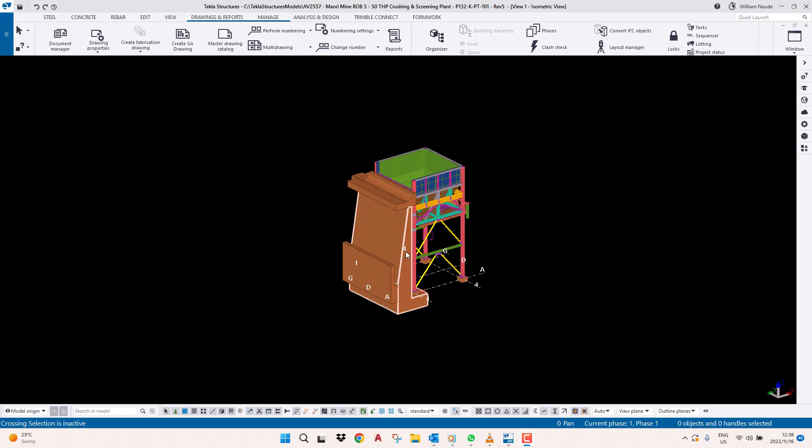In this video, we're going to cover how to export drawings from your normal PDF concept of printing to a DWG or DXF format. First, we're going to open up the Document manager on Tekla Structures 2022, and choose our drawing. Let's choose the isometric drawing. Open it up and wait for it to completely load.

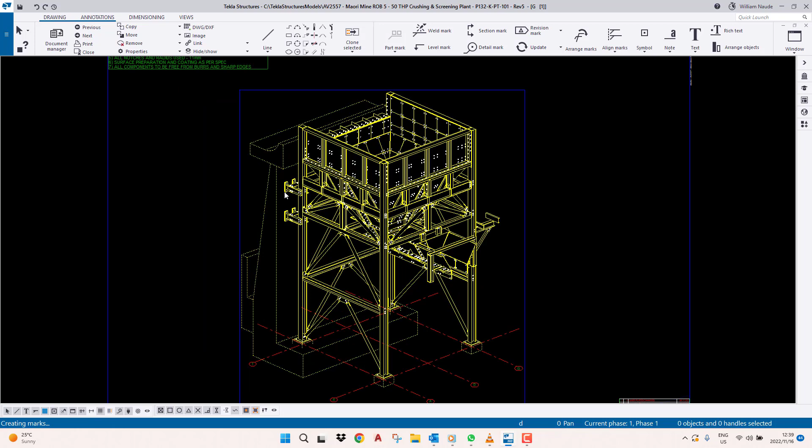As soon as you open up the drawing, I'm going to show you how this drawing works. What's important is that exactly what you see is what's going to be exported. I'm going to show you what you should try to avoid, especially on a view that has information on it. This is the isometric view.

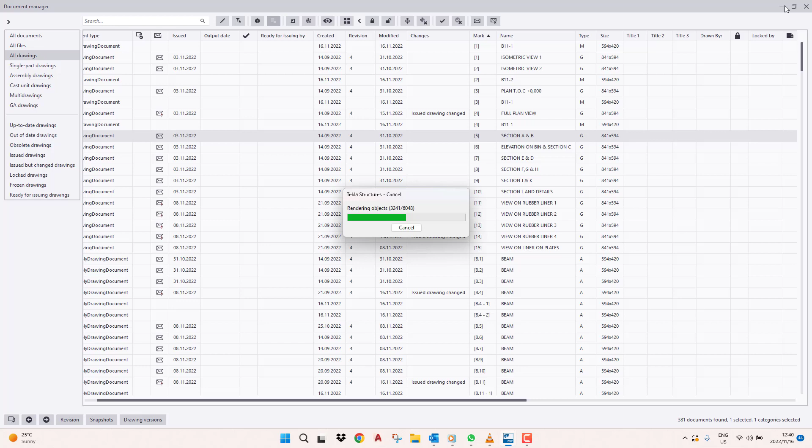So we're going to export two views: section A and B, and isometric view 1, which is the item I'm going to export to DWG format. As you can see, this part has quite a bit of information - some dimensions, etc. Now I'm going to show you what's going to happen.

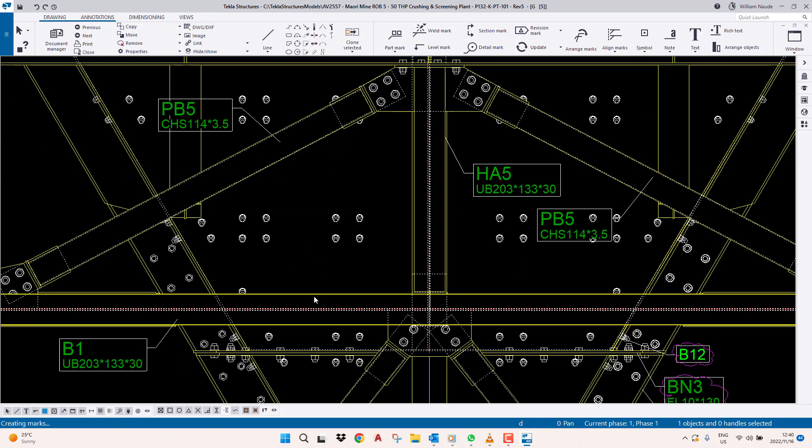Let's look at this item right here. I'm going to double click on this item along with a few other items - let's choose the pipe, those two pipes. What you need to avoid when exporting is putting it on a hatch solid, any color.

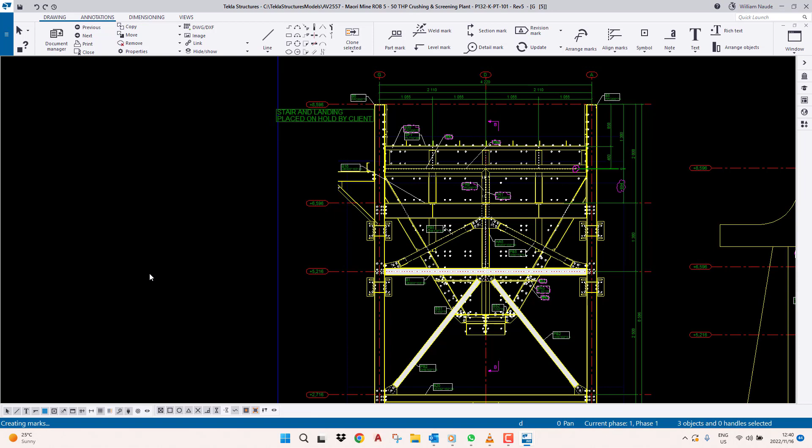Actually, I'm just going to choose special. So if you press B, it shows you how it's going to appear on a PDF, which looks very good - it looks very nice, has a good shade to it, and helps visualize the drawing better.

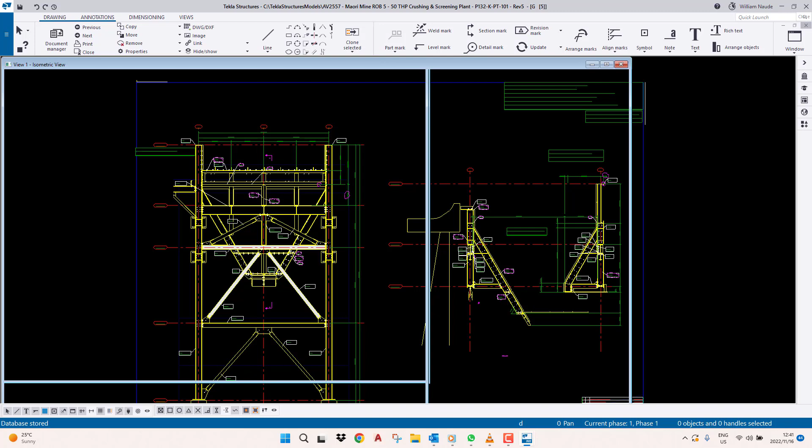So I'm going to save now, close the drawing, and then we're going to export it. Once we export it, I'll show you where it goes and what happens, and why you should avoid filling it with hatch when exporting to DWG.

Now let's open the Document manager again. We're going to choose these two items and go ahead and say export. Here you can choose what you want to add to it - the file prefixes, what type of format you want to use, the layer rules, etc.

I'm going to leave everything as is for now. All I'll do is change it to a 2000 format. The reason we choose 2000 is if you don't have the latest AutoCAD, you won't be able to open it and edit it - remove certain items, edit something, or anything like that.

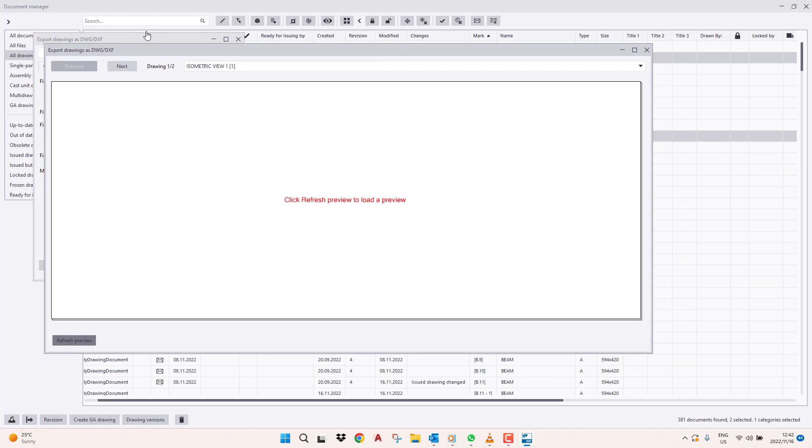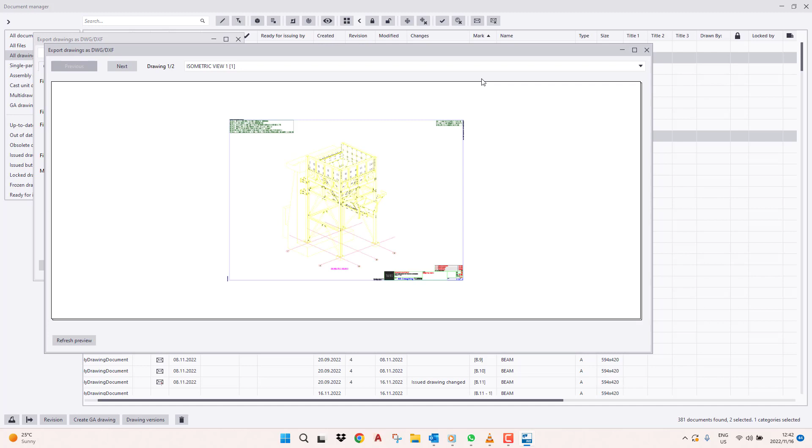Now you can draw it as a snapshot to CAD model space, etc. If you choose open preview, you can click refresh and it'll show you what you're going to see. But it's not truly accurate - the only way to truly see how it's going to look is by opening it in AutoCAD. What it does show is what view is going to be shown, and how it's going to look on your item.

So I'm going to close it now. At the layers, you can choose your line weight and line styles to go according to your Tekla or your CAD drawing. You can even choose how you want to filter it, etc.

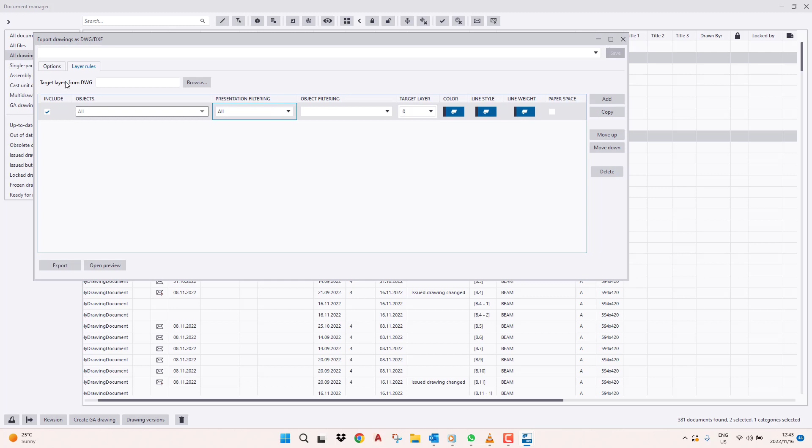I'm not going to do any of that right now. Here you can choose do you want it as a DWG or DXF. The reason I gave you also this is some companies prefer to use a DXF file, and the DXF file is used on other programs as well, not just AutoCAD.

So any CAD viewer, and some want you to export it as a DXF file because they want full-size plates. Your Tekla has the function to do so and do it properly, but sometimes if you've drawn incorrectly and export it that way, it doesn't export the plates correctly. So what we're going to do is choose the export function now.

As you can see, it's busy exporting, and it's going to give the name G1 isometric 1 Rev 4 or whatever you want to call it. It all depends on what rev you are currently on, and it has all this information over here. Then you can put in a prefix also, and it will go automatically to your plot files location.

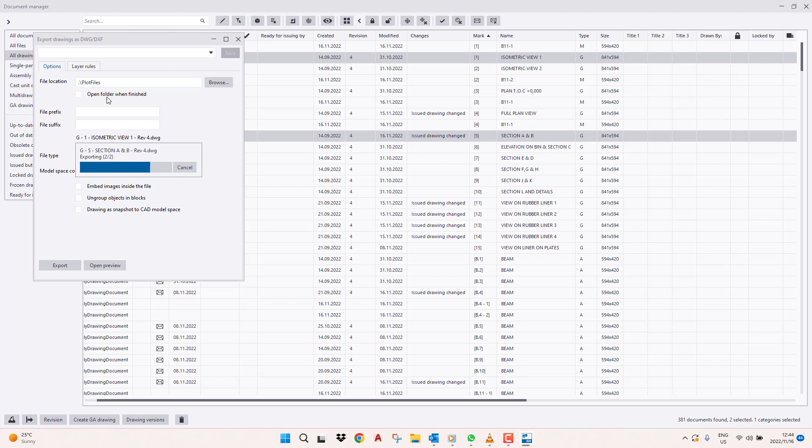I'm going to show you how to get to the plot files location. You can change it, or choose open folder when finished, and tick it on to export it. I didn't, because I want to show you now what you can do. So you go to your drop down menu and open model folder. Once it is open, you're going to see plot files are located right here. And there we have it.

So if I open up my section view, I'm going to show you now why I advise you not to export it as a solid. The hardware solid function and the color with that, why you should try to avoid it. However, it does look good, especially once you use it on a PDF. You print it, and it looks very good because it has a different shade. It looks actually very neat, has a good view to it.

But as soon as you do it like that, my AutoCAD is opening on the left screen, I'm going to move it over, don't worry. As soon as you do that on your AutoCAD, I'm going to show you now what happens to the item. I'm going to pull it over here, and what I'm going to do is double click on my mouse button, and it's going to throw it out like this.

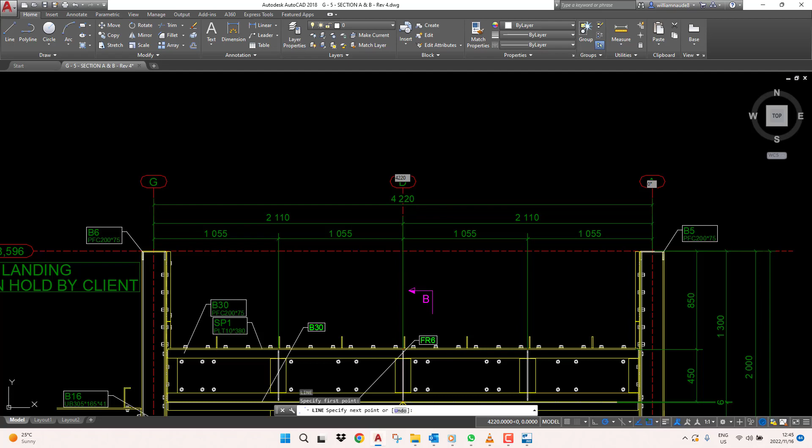Now there's two ways of doing this. This is your model space. In your model space, everything is scale 1 to 1. So if I press L for line, this should read 4220 from grid G to grid A, and 4220. As you can see, this is now on a scale 1 to 1.

But if you want to see the rest of the item, you go to layout 1, and here you have your logo. It exported your logo, everything into this right over here, and then you can export it or do whatever you want to do with it.

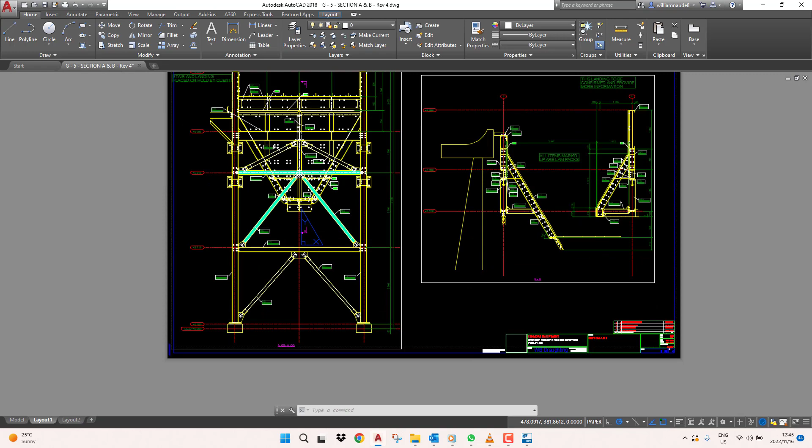Now here's what happens when you do it with the exporting of that item. As you can see, it becomes a solid item, a green color, and sometimes if you've tried to delete it now, you'll see that it removes it completely. So you have to explode it, and then edit it, and yeah, it's a big waste of time, because here's what happens. It even removes how the bolts will look like. As you can see over here, you don't have a hidden value anymore, nothing like that.

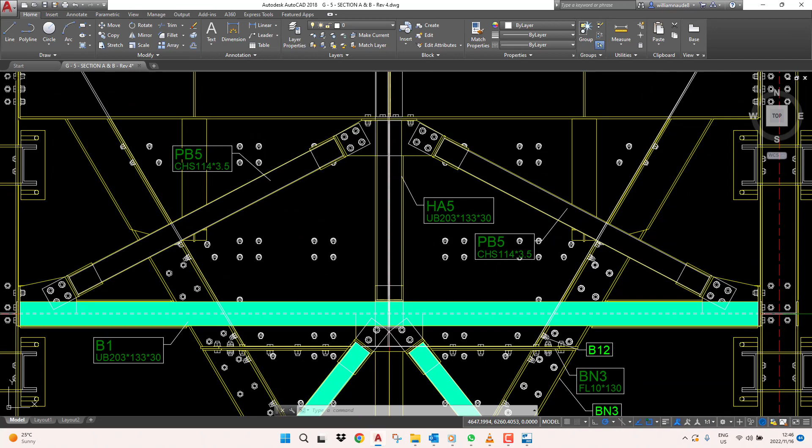So it's not ideal to use, and that's why I would say just continue using wireframe instead of hardware solid when exporting these items. So yeah, this is basically how you're going to export your items to a DWG or a DXF format, depending on your client's request.